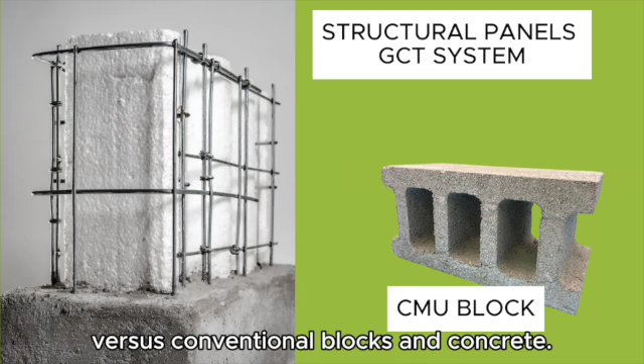How our structural panels have advantages over conventional blocks and concrete in many ways. 7 advantages of the structural panel system versus conventional blocks and concrete.

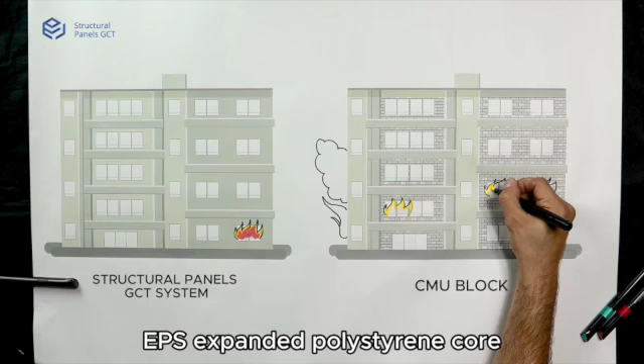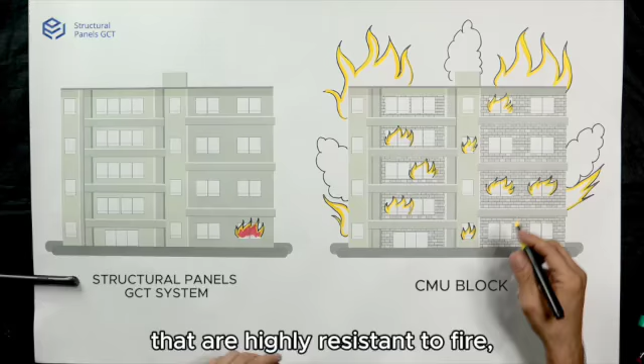Fire resistance. Our panel system contains a self-extinguishing EPS expanded polystyrene core, which makes it non-flammable, which will not generate flames. In addition to being enclosed between concrete surfaces that are highly resistant to fire, it has a fire resistance that ranges from 60 minutes minimum to 240 minutes minimum, depending on the thickness of the concrete cover used.

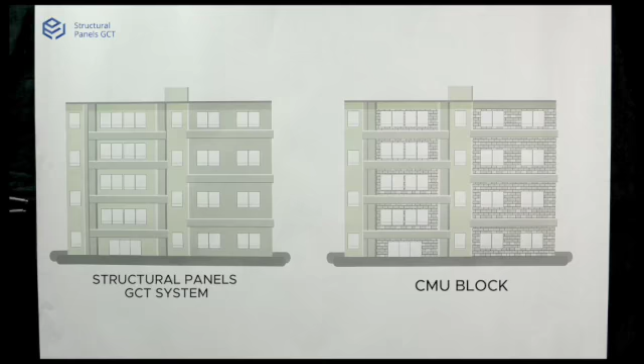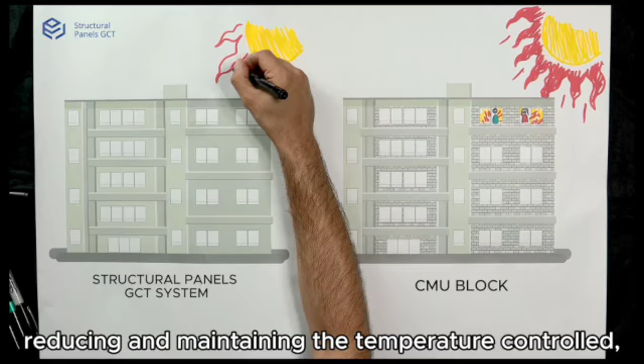Thermal insulation. No matter how hot or cold it is outside our structural panel system, you will not notice what is happening because of its high insulation value, since the system insulates the temperature, reducing and maintaining the temperature controlled, the opposite of conventional blocks, obtaining the same positive effect in winter.

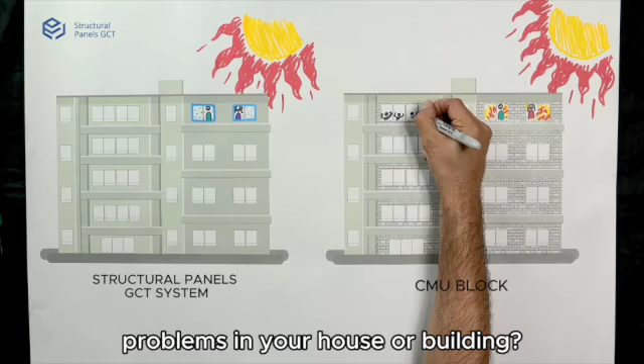Acoustic. How many times have you had noise problems in your house or building? Our system has the advantage of being a material that helps to isolate and block sounds from the environment much more than conventional blocks.

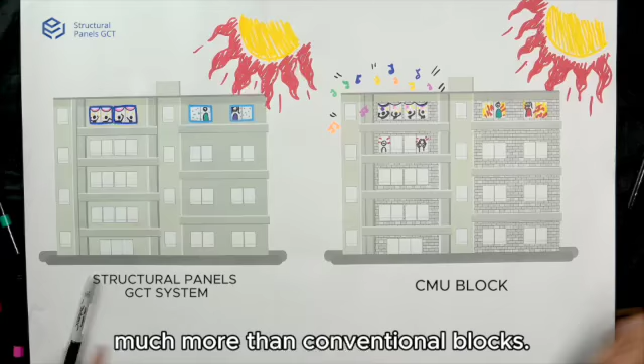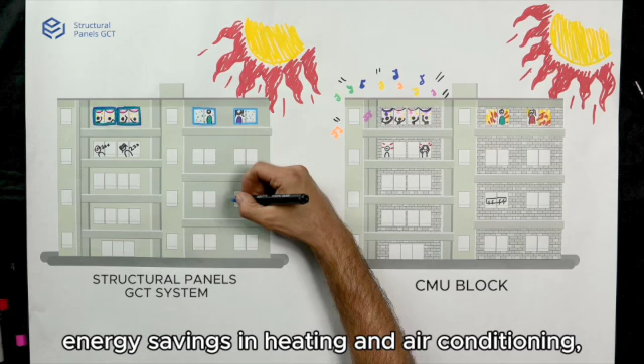Energy saving. The temperature inside a building with the system of structural panels climatizes or reaches its normal point much faster, which generates up to 60% of electrical energy savings in heating and air conditioning, unlike a building with conventional blocks. In this way, our system guarantees an important improvement in the temperature of the interior of the houses, favoring sustainable development strategies.

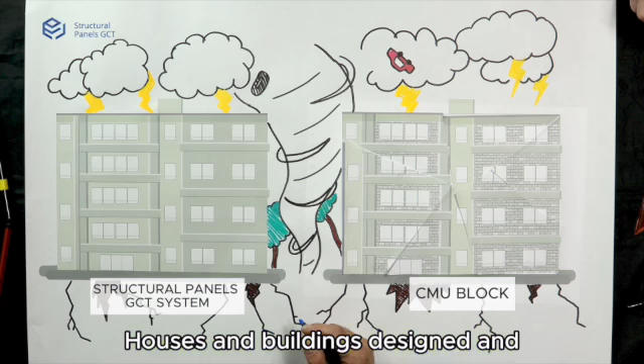Resistance to earthquakes and hurricanes. Houses and buildings designed and constructed with the structural panel system resist earthquakes and hurricanes due to their flexibility when properly designed by a professional engineer, with a performance far superior to conventional blocks and similar to concrete.

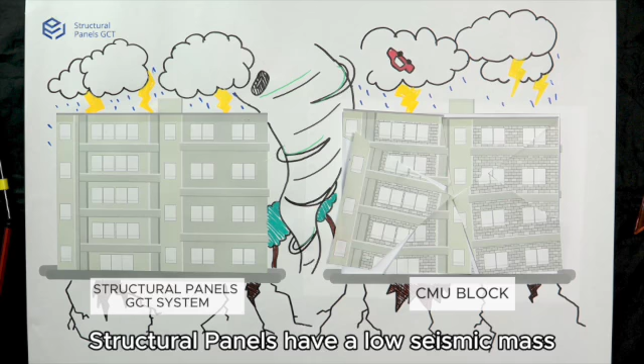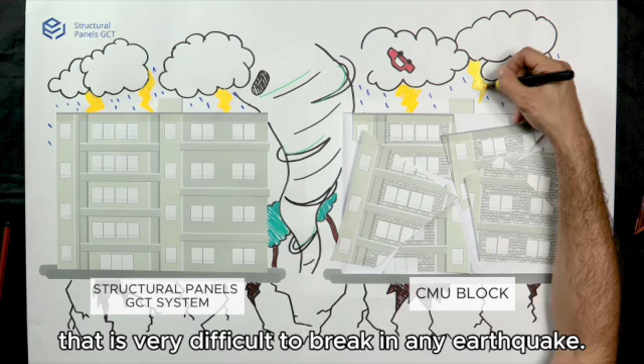Structural panels have a low seismic mass, but are rigid because of the 2 layers of concrete which create a box-like envelope that is very difficult to break in any earthquake. They have a high load resistance of over 15,000 pounds per linear foot of additional load.

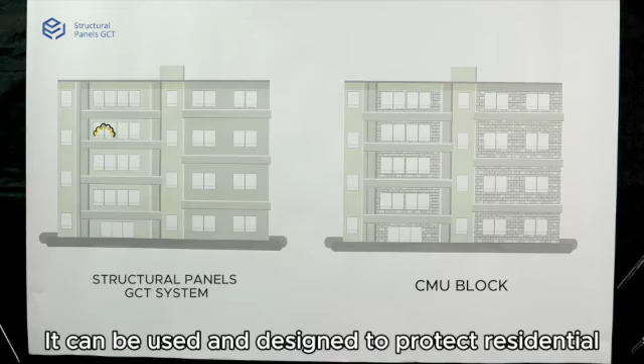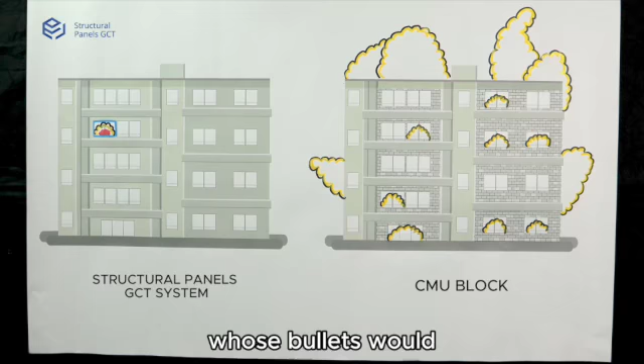Resistant to blast and bullet impact for added safety in schools and hospitals. It can be used and designed to protect residential and industrial structures against explosions and impacts of bullet-type projectiles from weapons up to level 3, whose bullets would easily pass through a conventional block wall.